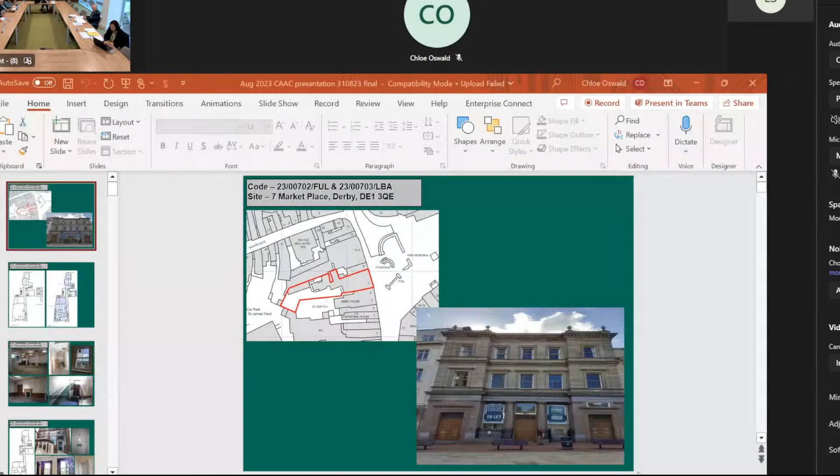So first on the agenda is number 7, Market Place. Now you'll recall that this has been before us, ground floor only, which has an approval for A3, sorry, for a change of use basement from professional services to cafe, restaurant or drinking establishment. Now that approval, and one of the approvals has now lapsed, and one is about to lapse, but that's irrespective of this application. If they bring them back to us, then so be it.

So we're looking specifically at the first and second floors, which are to be converted into apartments. So Chloe, can I ask you to? Certainly. Just a little bit of clarification: the applicant does not intend to include the ground floor use within the current application, and it may be that a further new listed building application is submitted for the ground floor.

In terms of the ground floor, changes to the already approved scheme are relatively limited and relate only to some changes to doors. I should say we've had confirmation today that in the original application it was proposed to replace all the windows and add wall insulation. We've had an email to say they now wish not to undertake those things, and they'll be looking at secondary glazing to all the windows instead.

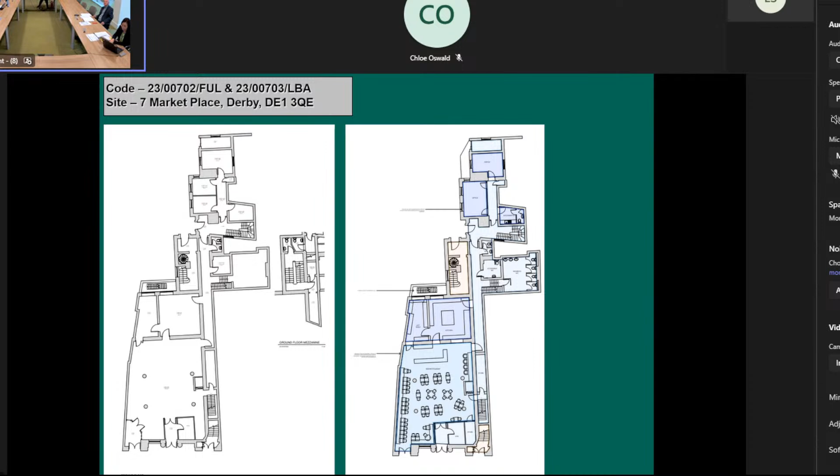So this will be subject to the acoustic report, which is expected next week. So, as I mentioned, other than the approved plan, there are very limited changes to the ground floor.

So to the first floor, this just gives you an idea of the existing quality of that front range, the cornicing, and the joinery.

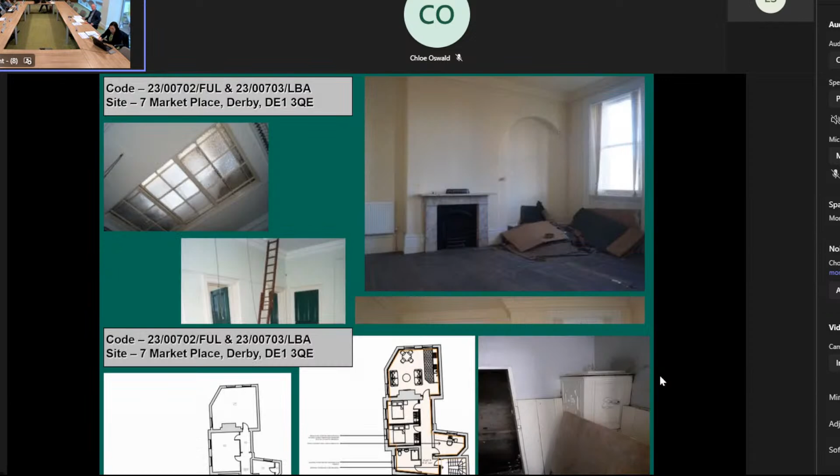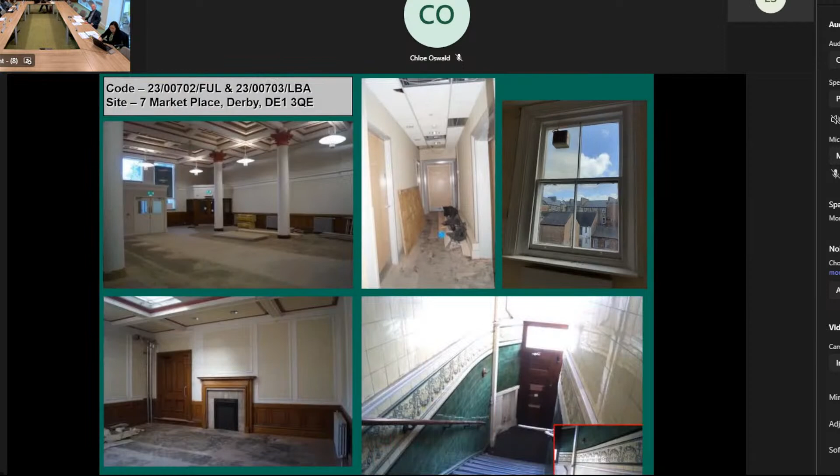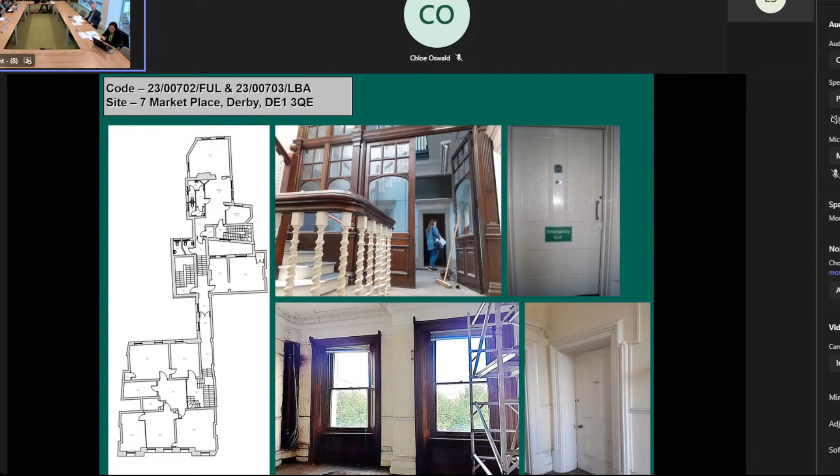So there were a number of changes being proposed on this first floor. I will come back to the first floor to show you. So in terms of quality, these are the spaces - you've seen these online anyway.

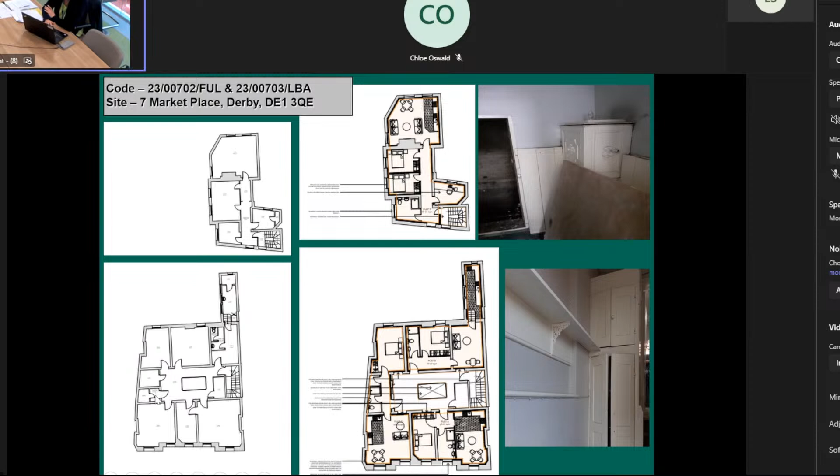Just while Chloe is doing that, Max has made a comment, not about the design, which he actually supports, but he said that the heritage statement said it was designed by somebody - he said it was actually designed by Smith, for the Smith Nottingham Bank, and built in 1871. So, a slight contradiction to the heritage statement.

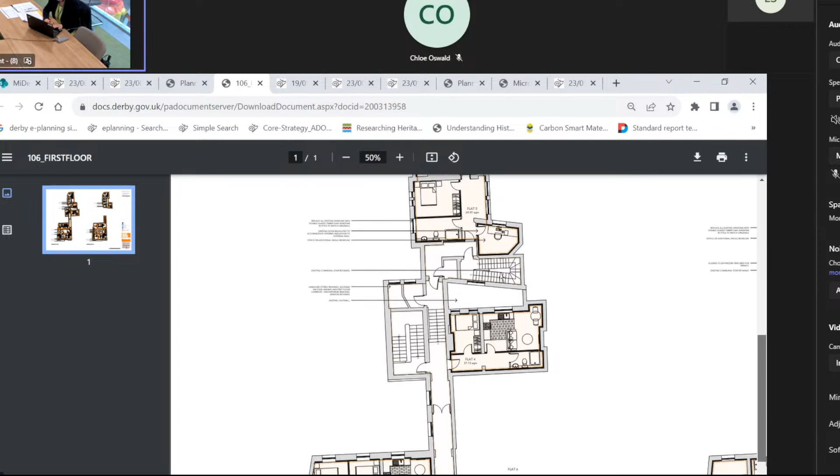So here are the first floor plans which you've seen online. Just zoom in slightly to run through the proposals.

There are a number of walls which show lining which is no longer proposed. In terms of the proposal, there is a level of subdivision within some of these spaces of the rooms that front the marketplace, some existing and some new. There are proposed new structural openings, obviously kitchens and shower rooms being proposed.

Once again, I think subdivision and the new structural openings are the ones which I wanted to point out to you. There's also the blocking of some existing doorways. You can see one adjacent to flat 3's living room.

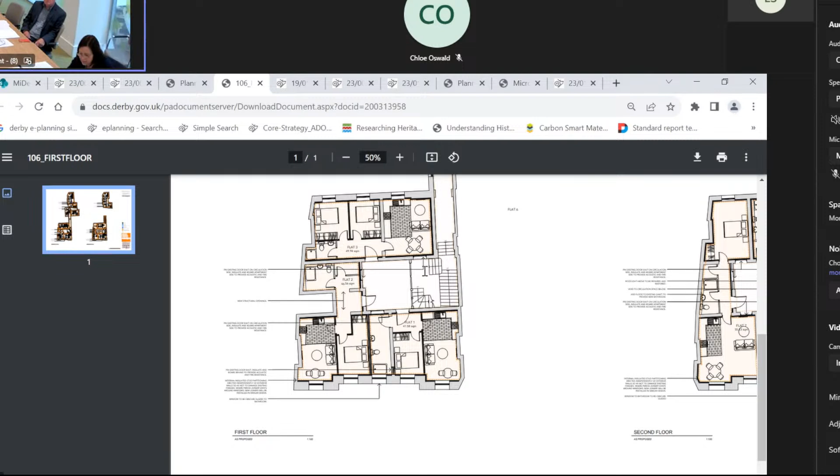In terms of the proposals. Okay, yeah, that's great. Thank you, Chloe.

Going back to what Chloe said in the first instance, it's good to hear that they have decided to keep the existing windows, to introduce secondary glazing, and to retain the wall lining, because there are quite a lot of distinct features and linings, door linings and architraves, cornices, and skirtings, which you can see is high quality there. And the high quality elements do seem to be towards the front of the building, which you'd expect, being a banking hall. The rear section is of a lesser quality.

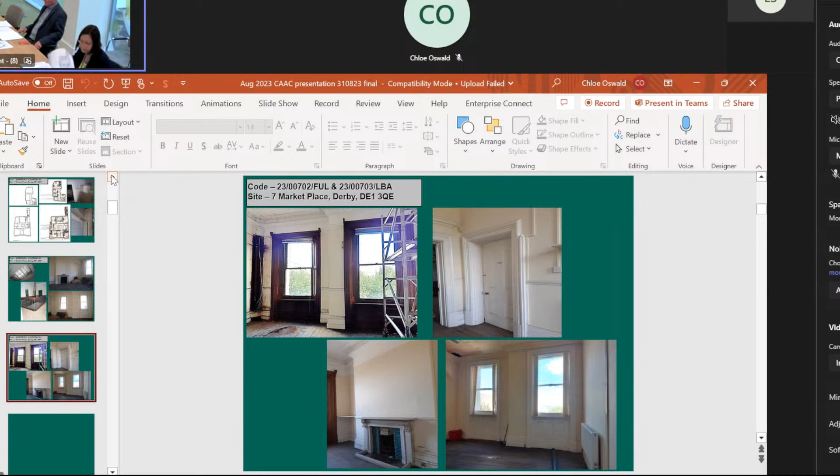So the next item is Wilderslowe House. Again, this has been before us before - as you recall, it was part of the Wadensmere development of the former DRI, that's now been sold off separately, and we've got a scheme to convert this into 14 apartments, which retains the old extent of the building, not as old as the main building. There are other elements as well - the conservatory is to remain in the form that it's in, but it's actually going to be rebuilt with different glazing. So we'll discuss both.

The state of the interior of the building is extremely poor. You will have read the heritage statement, which was very comprehensive and very interesting, and there were some photographs in there that showed some of the condition. I think this is one of those buildings that we've been trying to get under repair for a long time and get a new use for it. So over to you, Chloe.

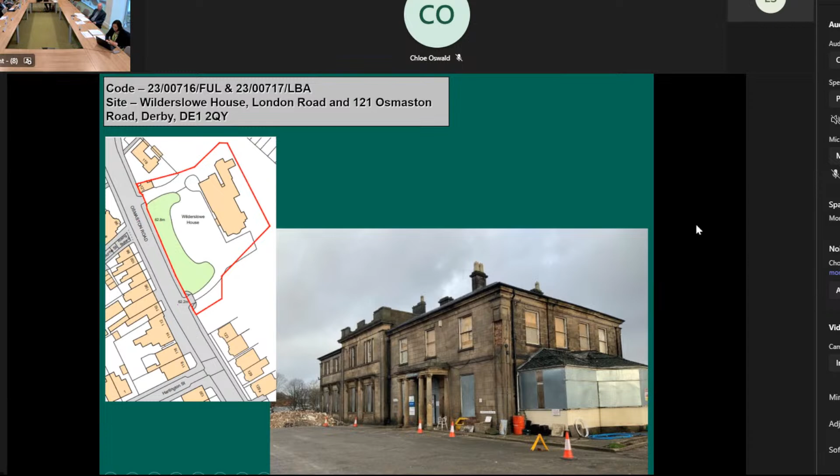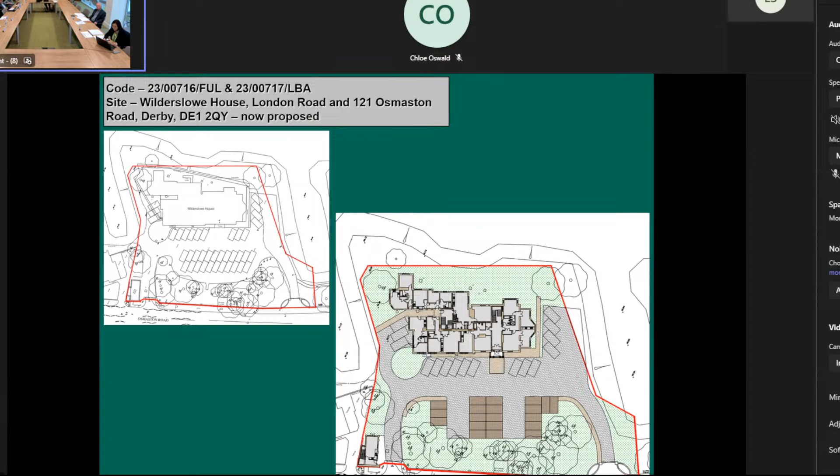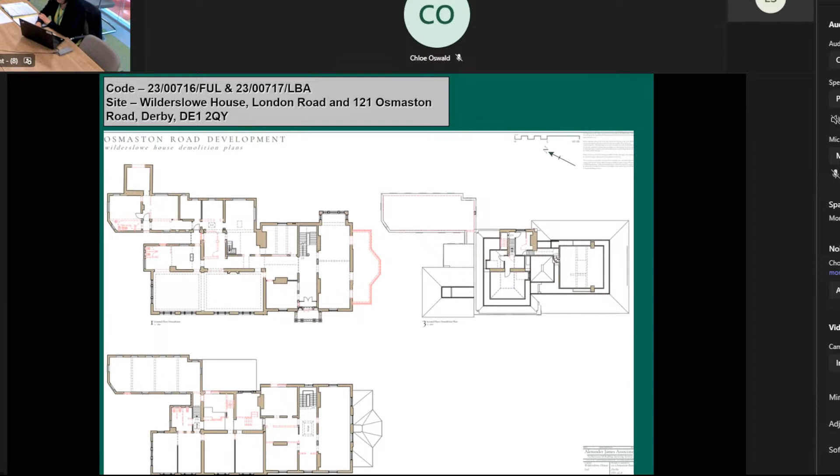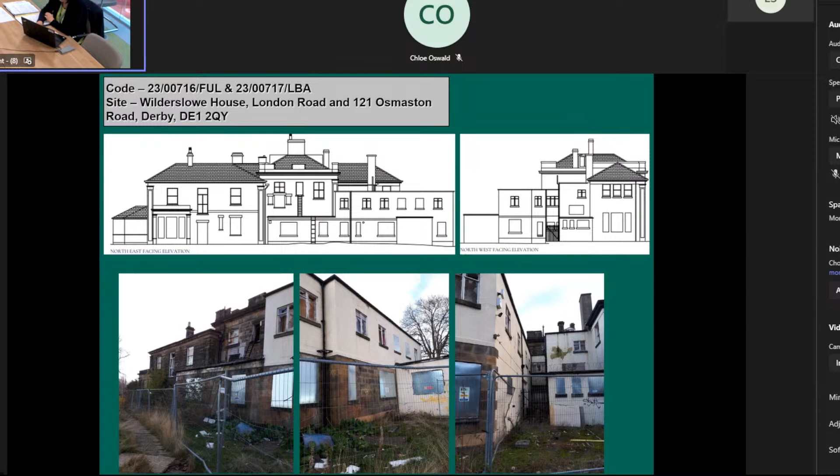So here is the north-east facing elevation, just focusing on the external impacts of the proposal. As you can see, the later extensions to the left side of the slide, which were previously proposed in this scheme, are proposed to be retained and a roof added - to the rear, to the side. Some photographs just showing you what it looks like. So these drawings show that 3-storey extension created on that back wing of the building.

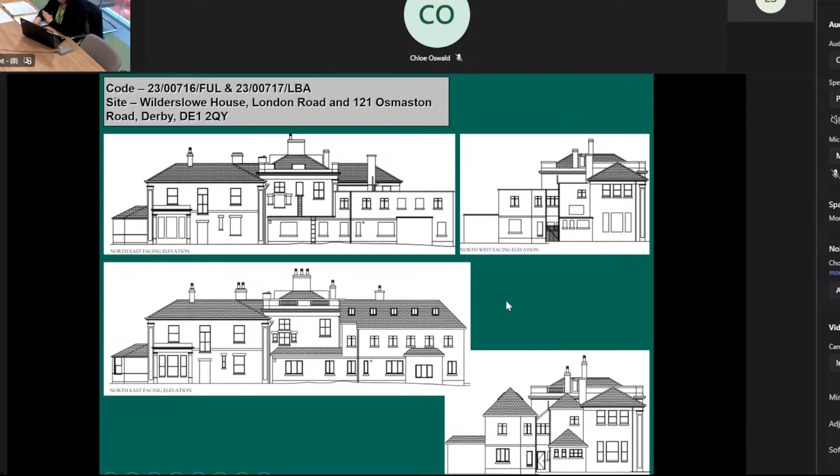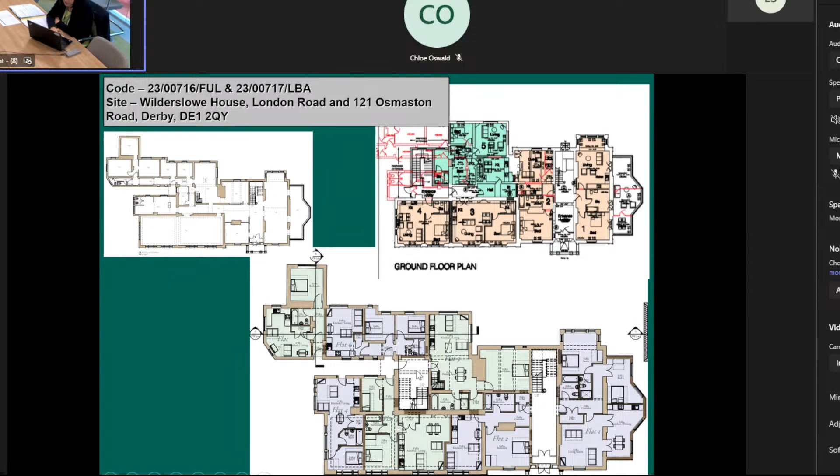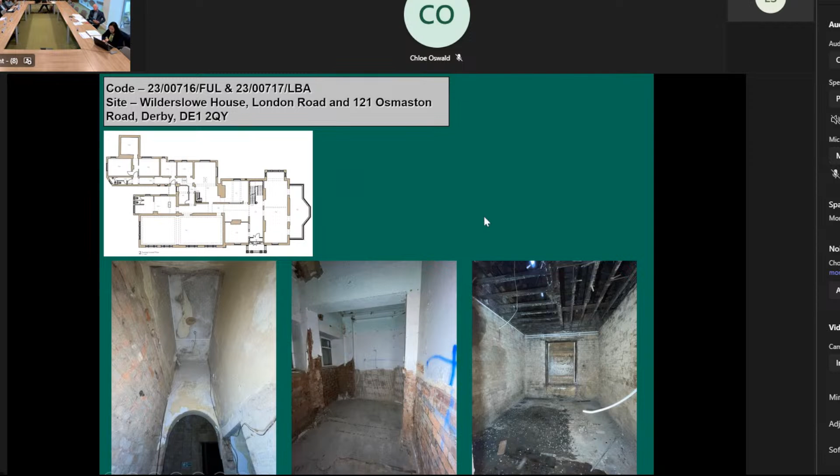In terms of the conservatory, I'm just obtaining some photographs showing the current detail. So it's on a brick plinth, it's got render on the outside.

The proposal is to construct a conservatory on that same footprint. But as you can see, it looks like there's limited windows. There are sash windows proposed to the southeast facing windows.

As I was unable to go in with the Smith team, slides will show you the current state of everything. These photographs were taken in 2018.

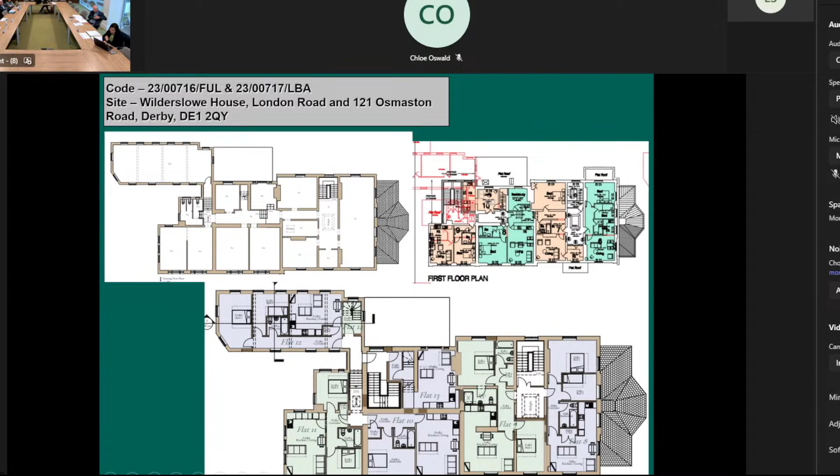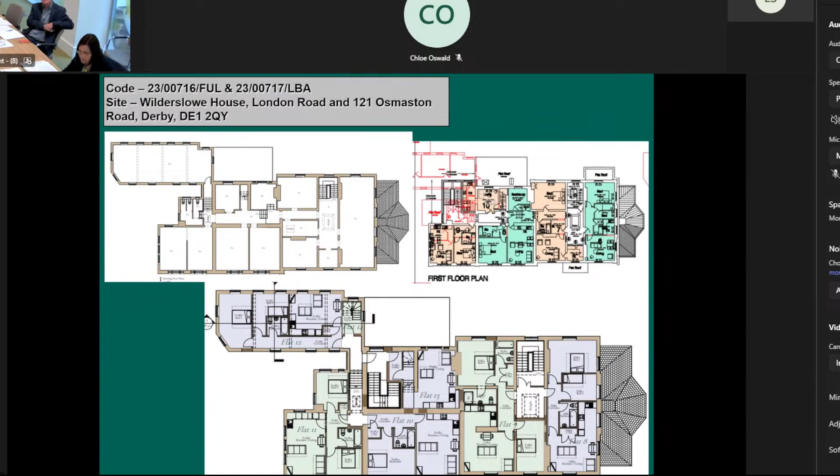So to the first floor, once again, it's the staircase. There's a change along with the retention of that. Main stairs with a mix, subdivision proposed.

Showing the existing proposal that we have to show, the now proposed second floor plan. Within the new extension, top of the two-storey, just a section through to show the details of that.

The lodge is also included within the proposals. It's thought to have been partially rebuilt in the past, according to the heritage statement. So the existing elevations show very little.

Proposed to these issues, apart from an extension in this area, a pitched roof rather than flat roof, and the extensions proposed right up to the front boundary wall. To the east facing, as you would have seen, instead of a single door, there's a double door proposed.

Inside, the reason for the extension to the previous extension is to house a staircase up to the first floor. Perhaps just to show you the simple zone, see the spaces.

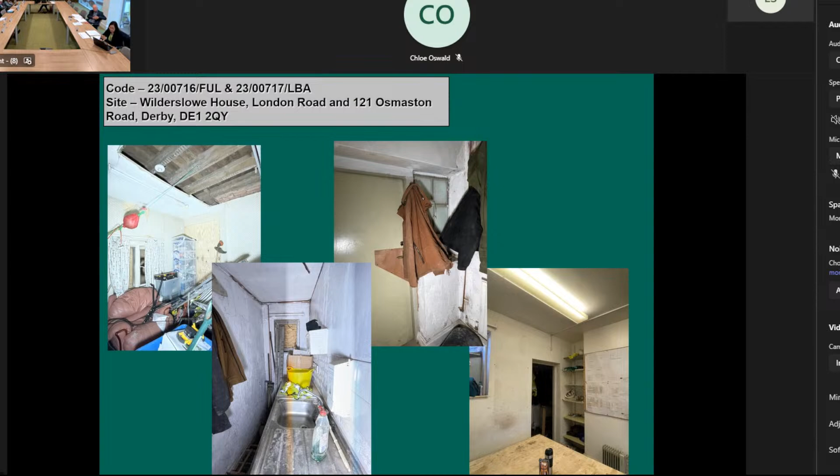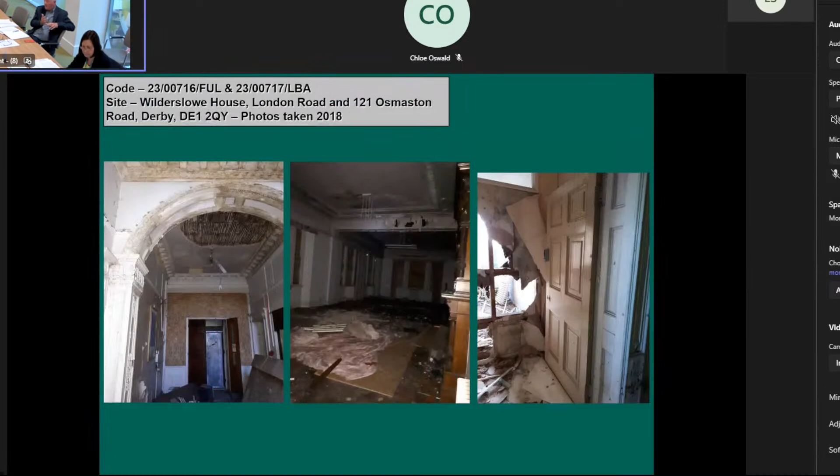Okay, thank you, Chloe. Yeah, so effectively we've got three elements to consider here. Firstly, there are repairs to the existing building, which is extremely important. Now, going to clean the exterior of the building and do stonework repairs, I think is a real positive. The extension to the second floor space is part of that, and the reconfiguration of the different materials.

That's to avoid the conservatory element, I think is also something we need to consider. And then the third part is of course, the lodge. It's a relatively simple building. Want to put an extension on the side with a hip roof on it. That small extension takes the proportion of the existing single extension on that side, but it comes right forward to the boundary wall. So that's something else to consider.

So, can I open it up for some discussion?

I was going to echo Chris's comments about the previous scheme. This scheme's been sat there for a few years now. Indeed, council. So really, it's to be commendable, isn't it? I think Max has been involved with it for a few years as well, getting something sorted. There are a few interventions there, but I think in balance, when you consider what they're taking on there, it's not a great deal.

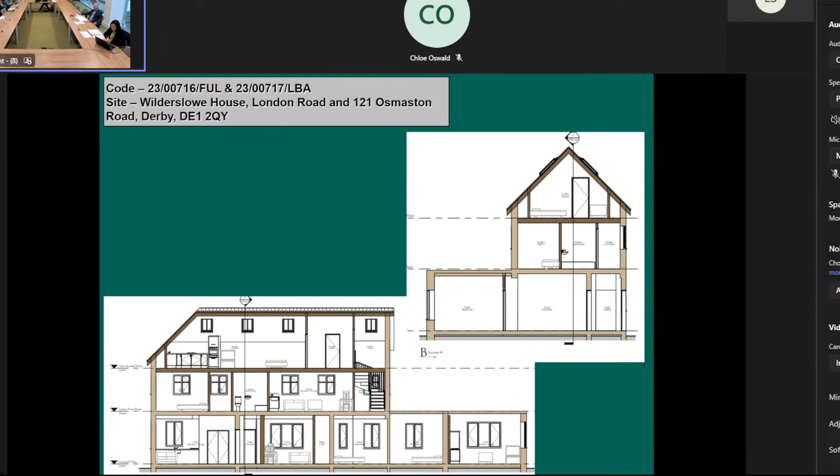Similar to the comment about the conservatory, it's a surprise they've bothered with the conservatory. It provides two bedrooms. But yeah, to call it a conservatory now, in this scheme, it's not.

I feel a little bit uncomfortable with the proportions, even though it's one of the proportions of glazing. I think it ought to respond to the addition rather than to the main building, a more delicate approach. So could there, I don't know whether it's shown like that, but is it proposed to be brick all the way around? I was thinking that if you change the window level all the way around to a different material, perhaps boarding or something, it would maintain that band of different contrasting material. Well, I think it's intended that it is brick base and render.

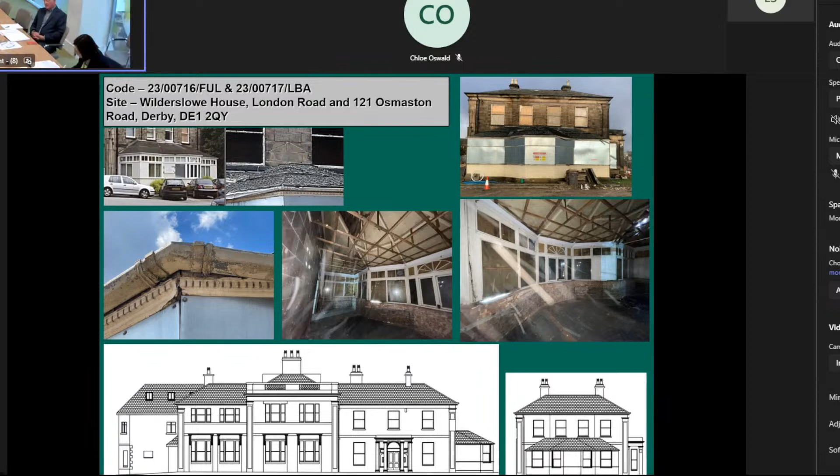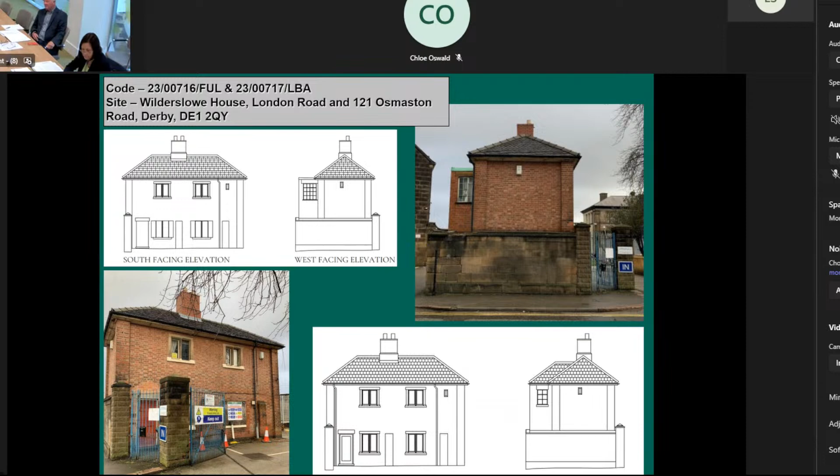So we've got, you can see on the photograph top right, the extension back. Now that extension is a head and pulled right forward. You can see the articulation of those piers front adjacent to the wall. That wall is actually, in Max's heritage statement, acknowledged as part of the original boundary. The piers to the right of it, I don't think, are.

My thoughts on this is that I've got no objection to the extension being inserted, but I feel it ought to be set back at least to the depth of the pier return on the front.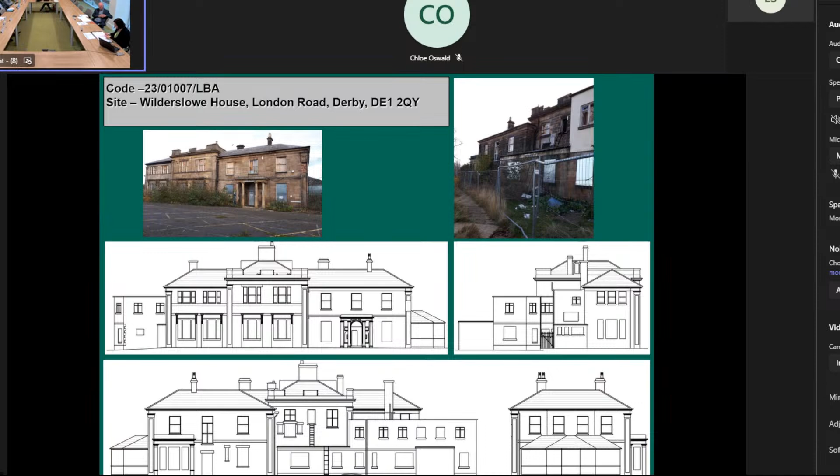The drawing that Chloe showed us with all the red notes is regrettably the full extent of the schedule for repairs. Now, I think there are a lot of repair works that need to be done on that building. I think a slightly more detailed document would benefit not only the contractor who's going to do this work, but also the officer, to see what is actually going to take place - have some sort of specification alongside that.

Because this building, the only elements left of any historic character is the exterior. And if that's not done right, we're going to end up with a reflection of the original building. I think a little bit more detail ought to be requested. As you were seeing, there is a restoration specification online, but yes, I would normally expect a bit more detail than this came in without a program.

So you'd normally look at elevations, maybe to show these sorts of jobs. It's often that they won't know the full extent till it's all scaffolded and you can actually look at it. So maybe, if it's also wanted to grant permission, then something that could be conditioned - conditioning it, yeah.

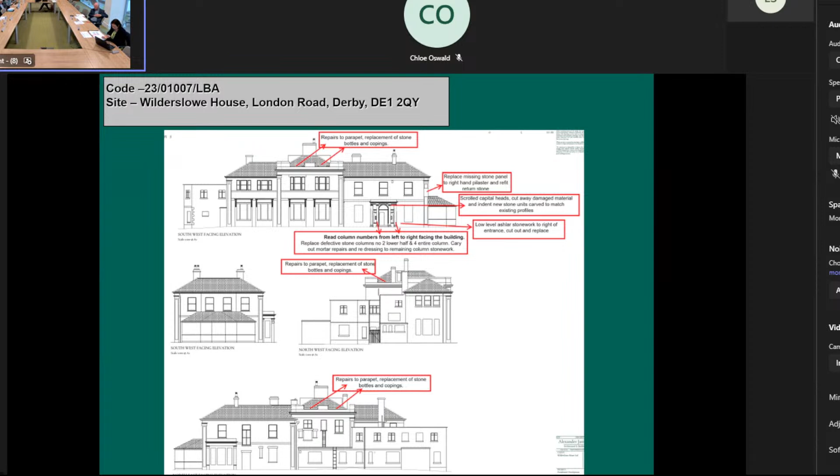Particularly in terms of curvature of some elements of the buildings, the new build that is. We obviously are going to concentrate on the modern warehouse and the engine house, engine shed.

I'll just point out, Historic England have actually come back with some comments which I think are worth giving you a resume of. They are asking for further information on materials and details in relation to the listed buildings and the residential development. They are concerned about the removal of brick partitions in the office area of the bonded warehouse, you call the curved triangle section.

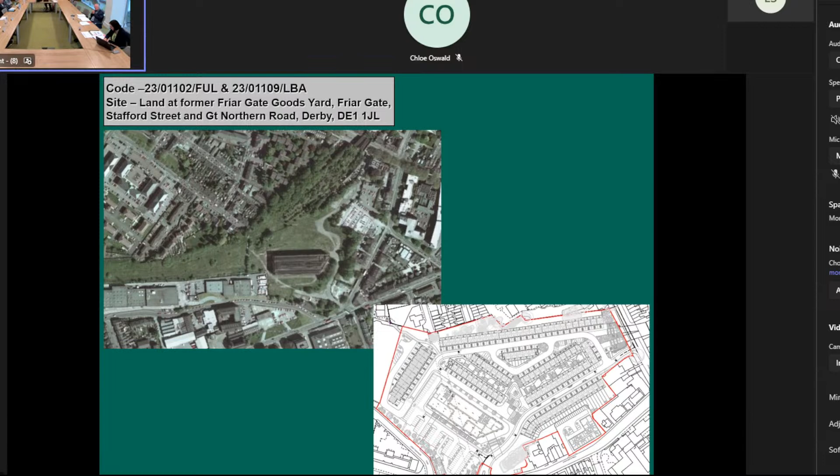So there's quite a lot of heritage statement, some recording documents for both the Bonded Warehouse and Junction. So you'll see in these what was previously on this site.

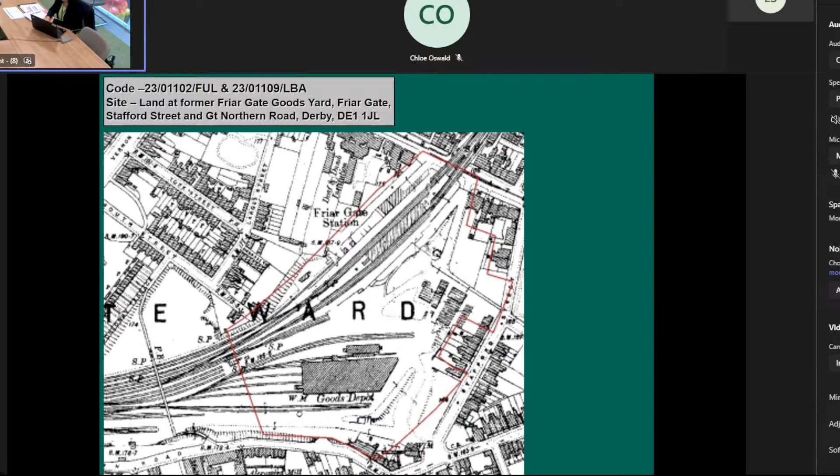So the proposal is for residential development and to convert the Bonded Warehouse and engine shed to pubs, food office space, etc., and to partially demolish the abutments to the bridge.

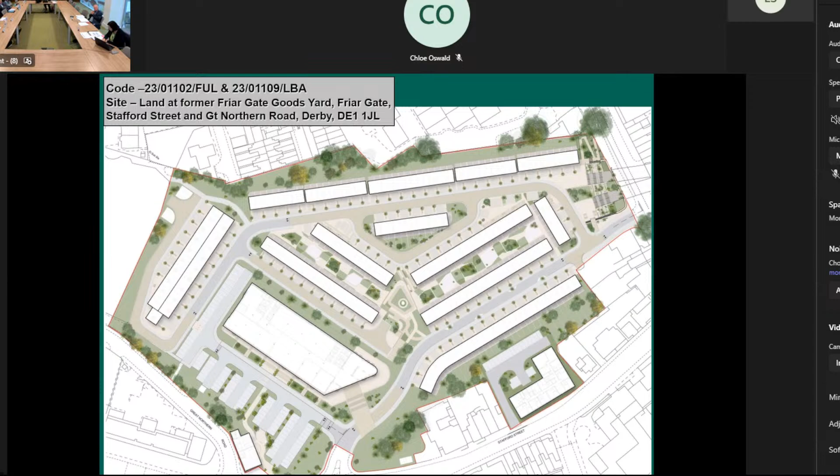So I'm going to go through each of the buildings in turn, starting with the Bonded Warehouse. Hopefully we'll be able to cover everything as we go through, and I'll stop periodically to see if you have anything to add.

So you're aware of the current condition of the warehouse. Historically, just wanted to show you the spaces and the roof form which you picked up in terms of the slate roofs, and some of the number of lights installed, which you can see in the pictures.

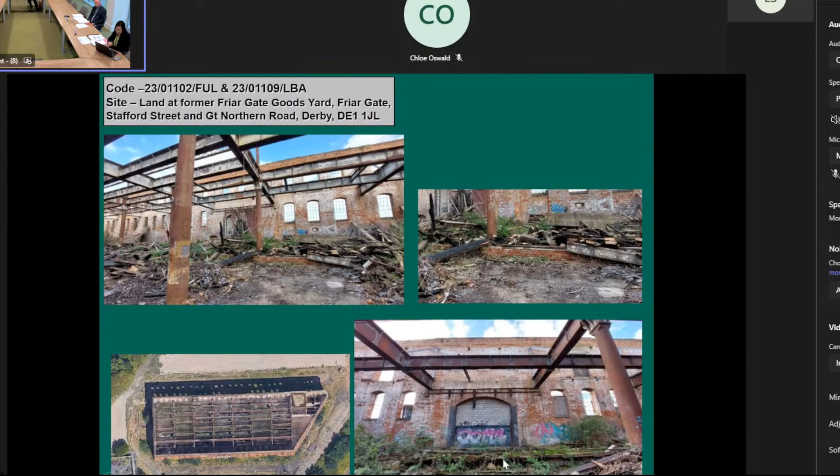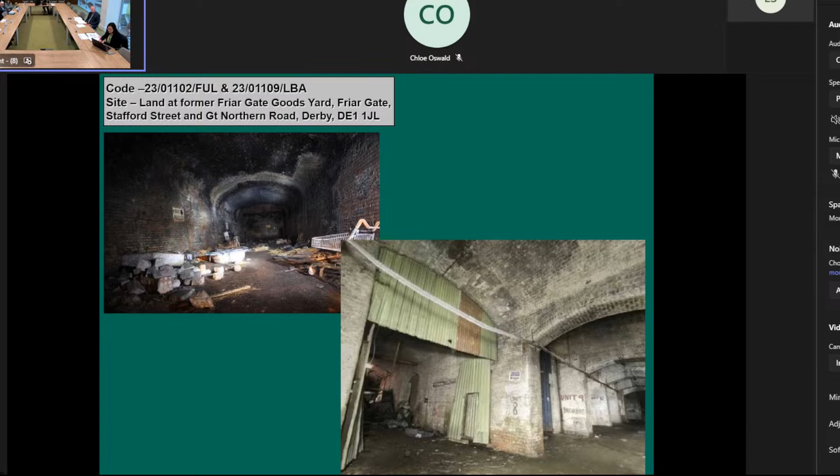There's also proposed at the moment a basement and the linking tunnel from Great Northern Road. I'm just showing you what's there, and we might have... so these are the proposals for the work.

So just looking at the proposals in terms of the existing demolitions plan, obviously there are some divisions in the former offices area which are proposed to be removed. Here, the proposal is working with that structure.

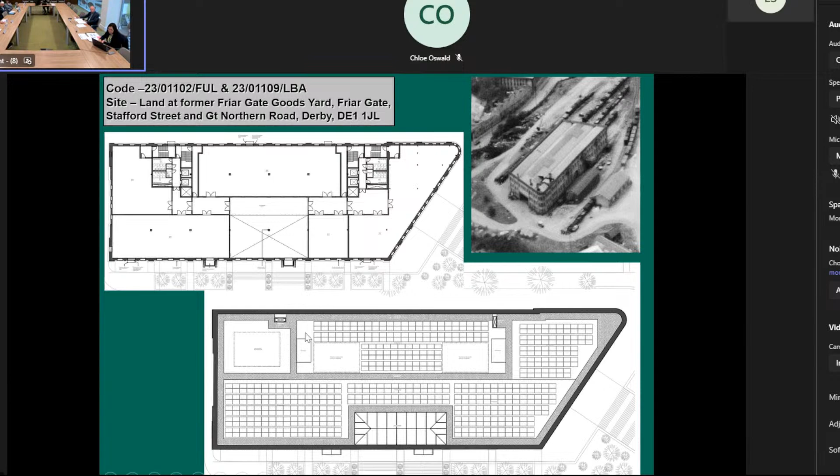To the roof, PVs are proposed, and 2 lift overruns. Just a section through showing it's proposed to be 3 floors generally—ground, first, and within the bonded warehouse itself, instead of the 2 that were originally there.

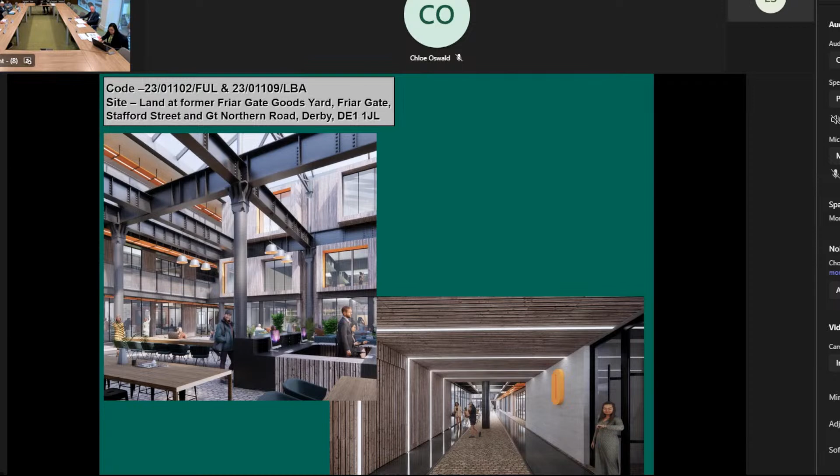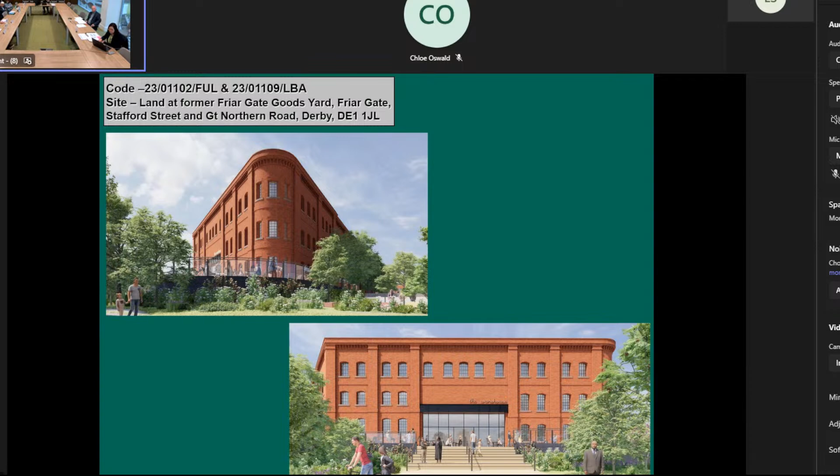And then some of the visuals which you've seen, so you can clearly see the 3 floors and how it's going to work, obviously with the steps leading up on 2 fronts up to the warehouse.

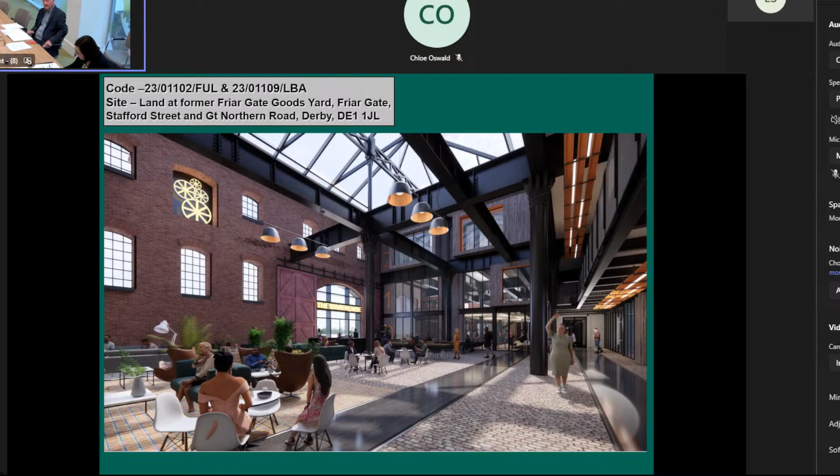So, yes, quite clearly a very big scheme. Just highlighting the concerns that Historic England had, relating to the offices area and removing the brick partitions. And I think I echo their view in that respect, because any existing structure really ought to be retained as much as possible.

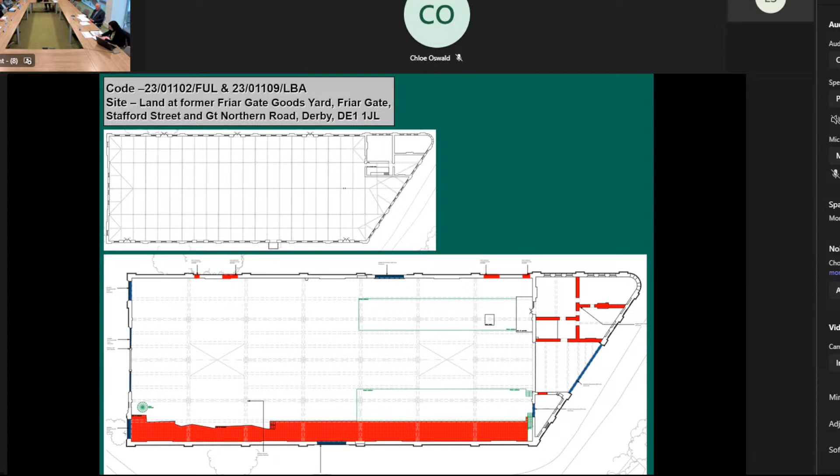And also wonder whether those sections of wall have any bracing characteristics for those anyway—structural engineers would know. So, open it up for discussion.

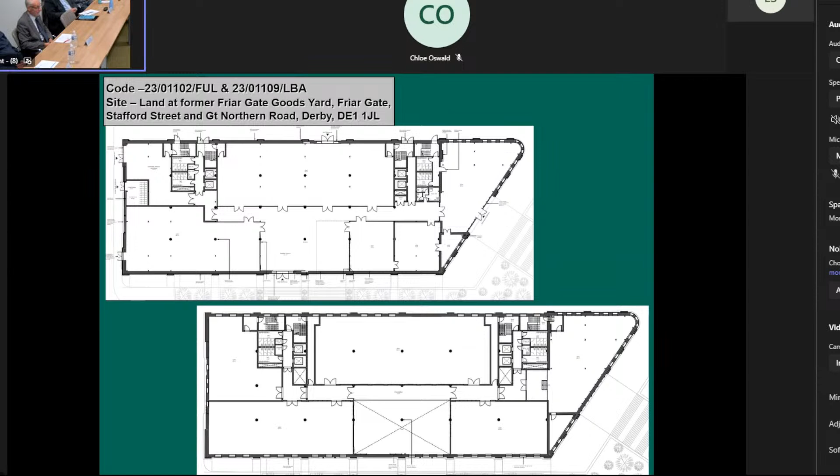Well, I'd like to open by saying that I would like to congratulate the architects on a massive project, and the developers as well. It's been sitting there for the last half century, gradually—in fact it's a testament to 19th century engineering that it's still there, despite everything that's been thrown at it. I mean, there are obviously elements of detail we'll probably discuss, but personally I'm not too concerned.

It should be retained or can be retained. Yeah, fair enough. But as far as the platforms are concerned, surely it's really helpful. No, I share your view on that, David. I think because the platforms are really—there's very little of it left—and for the sake of creating an entertaining space within that building, which picks up on the imagery of the railway very well, I think. So I'm not concerned about that.

I also welcome the reintroduction of the lucams in a modern interpretation, which I think is good to do. The only thing that I would echo is the wholesale removal of those partitions and the different windows proposed. Originally timber windows in the section you can see at the central photo, which I think should be put back as timber windows in offices. And the metal windows down the side, if they're capable of being restored, that's fine, but a metal window replacement down there, I think, would be possible.

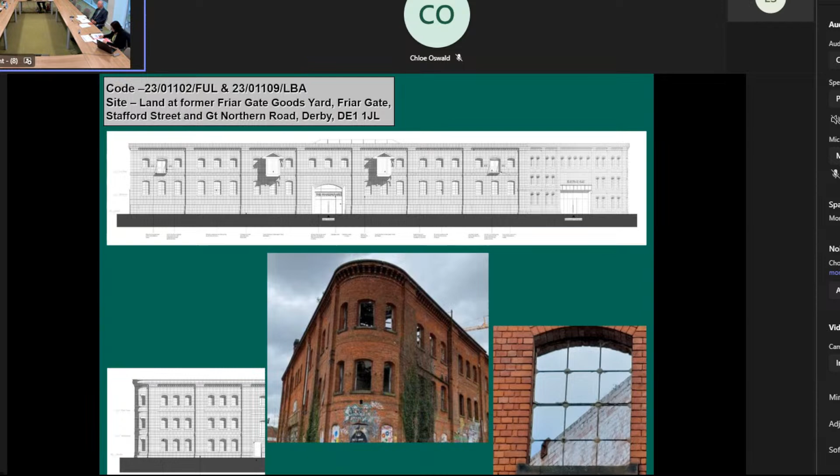Also very much positive about the whole thing. I mean, we mentioned a lot of stuff when we did have that discussion, two meetings ago, three meetings ago, I can't remember. And I'm sure we did mention the importance of the integration of the bridge and making that a destination in town. I'm not sure they've worked that out really yet. It's not necessarily entirely their responsibility, but I don't think anything they're doing is going to stand in the way of something more being made of the bridge and just bringing the site back into use.

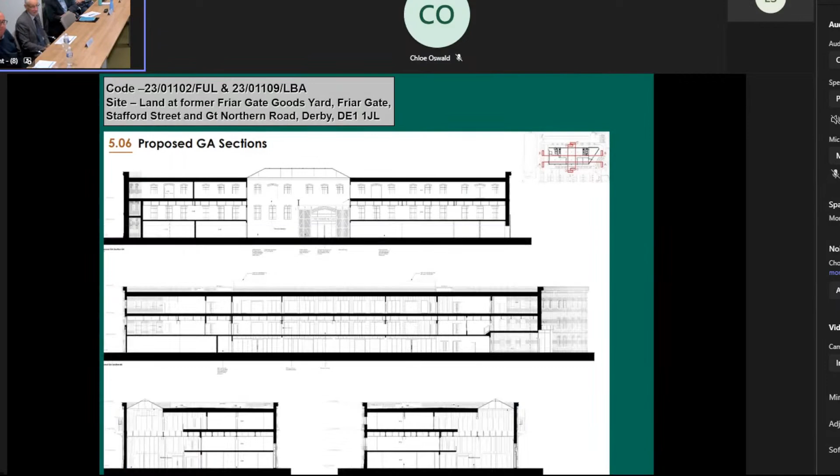Well, they've got these two big staircases, otherwise don't go anywhere. No, well, they're sort of hamstrung a little bit because the development on the other side of the road forms a very definite full stop. Well, that was another reason I objected. It didn't happen the way it was supposed to, the engineers. Do you have anything else to mention?

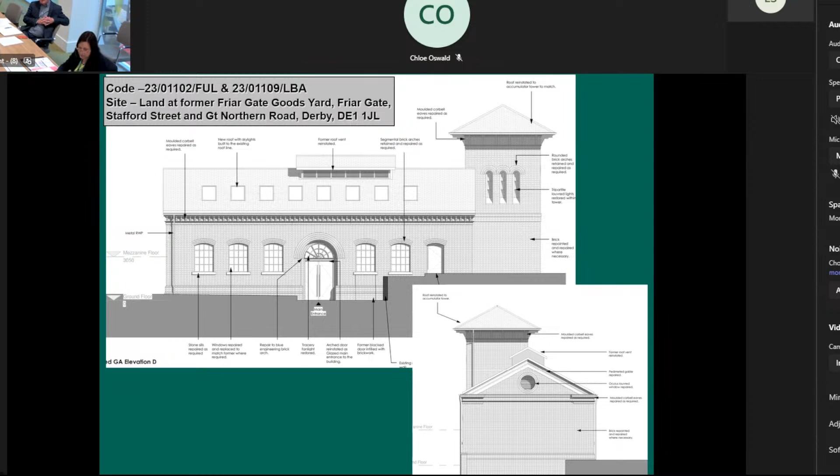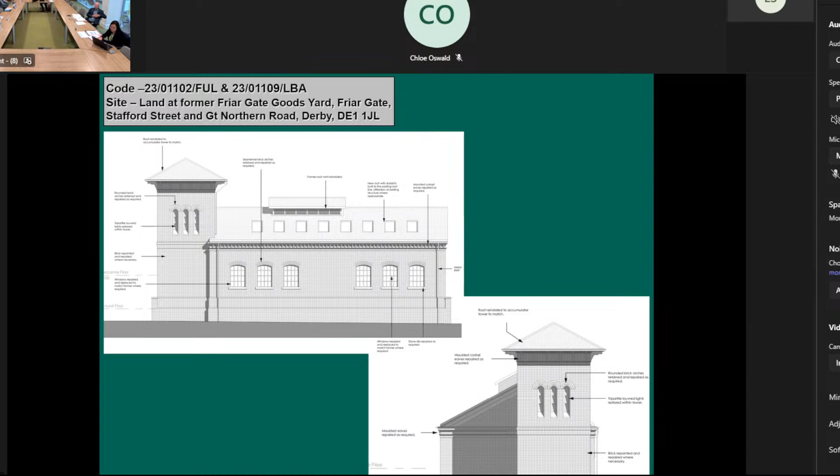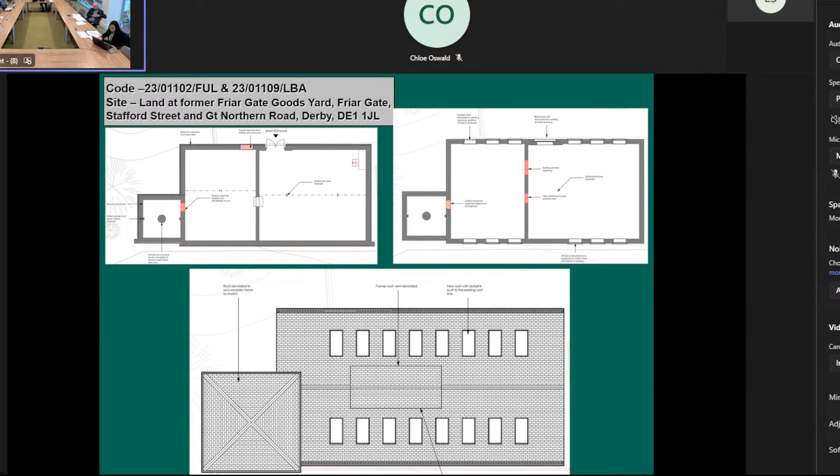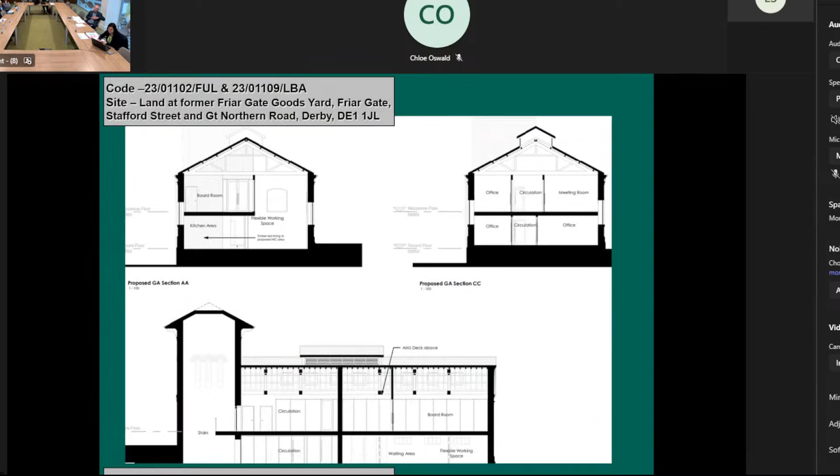That's the shed. Okay, summary: the elements on the engine shed—I think the interpretation of the interior spaces, the use of the accumulator tower for vertical circulation, and the expression of double height space and void, is all very clever. Well done.

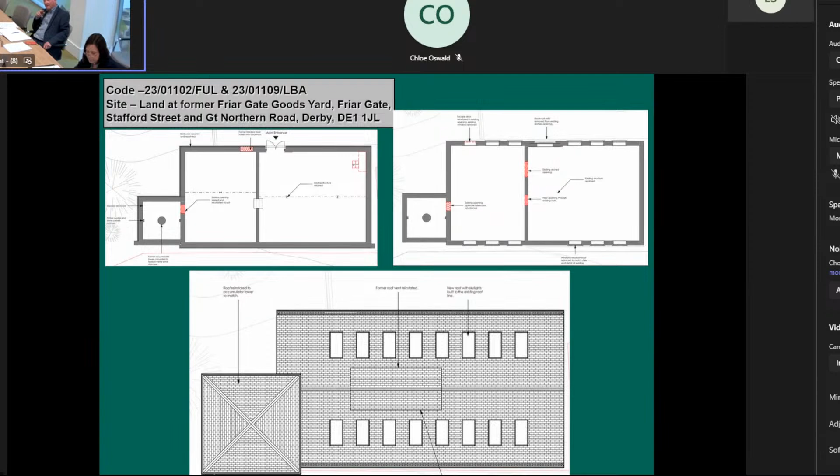The roof lights—you've got 8 down each side. I do feel that's a little bit overkill, so they could potentially be reduced down, and I think Historic England referred to that as we mentioned earlier. But it wasn't uncommon to have inline roof lights in a building like this. My observation is that if you had 2, miss one, then another 2, miss one, I think that would be sufficient.

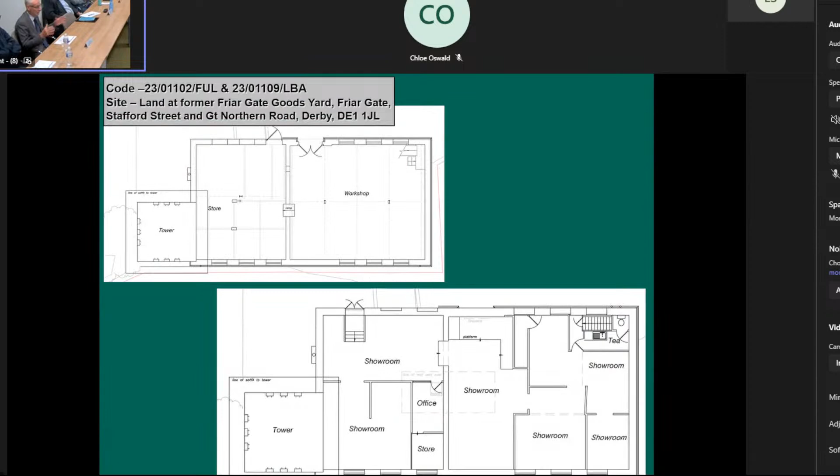Would it look better if they were continuous, with glazing bars in between? A continuous strip, yeah—perhaps just one down. Potentially it could, but then you'd get a long glazed strip in the roof, which is sort of flexible.

I'd have thought to start with they'd just line them up with the windows. Potentially so—and this end here too. If you're on the drawing, the scale is such that it doesn't really show, so I think the windows need to restore.

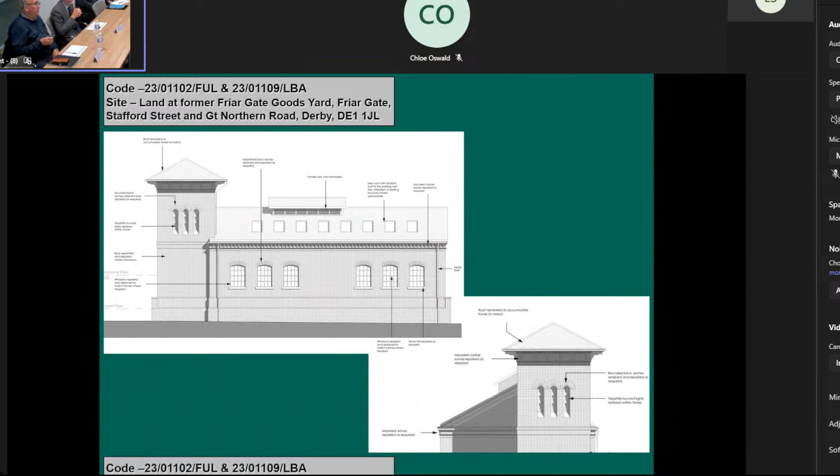Have we got an end user for this building? Well, it looks like it's been designed for an end user, doesn't it? No, they came before—they were starting the business. They did mention it looks like it's been designed for somebody particular, which is fine, but we need to consider that.

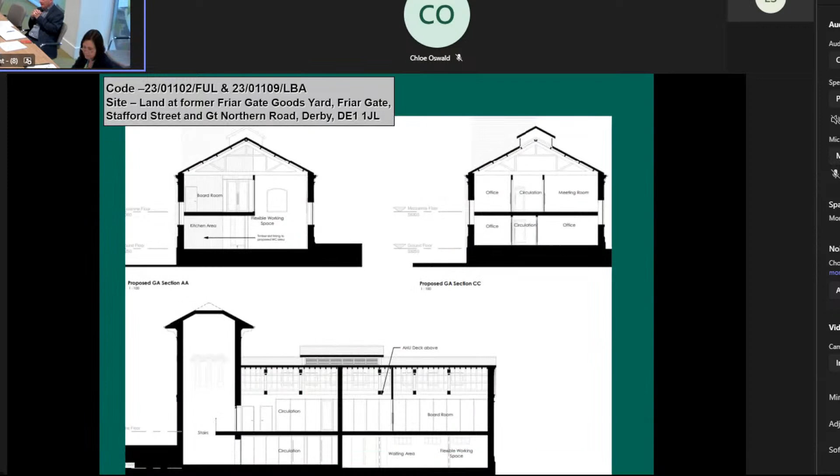On the roof structure—there are apparently elements of the roof structure that still exist, and I think a structural engineer needs to look at it. If the pattern of that roof is such that it still works and responds to the scheme they've got, then I think that's a path to follow. I still think that sort of green post arrangement they're showing there is quite attractive and works well.

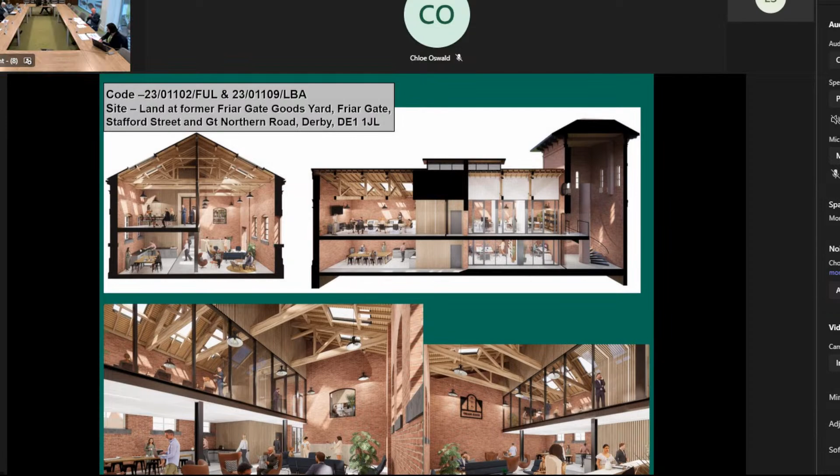Thank you, Chloe. Moving on to the next item, which is the bridge abutments—vision bridge abutments to Friar Gate Station, on top of the abutments adjacent to the bridge and the entrance, so the stairs up to the station platform.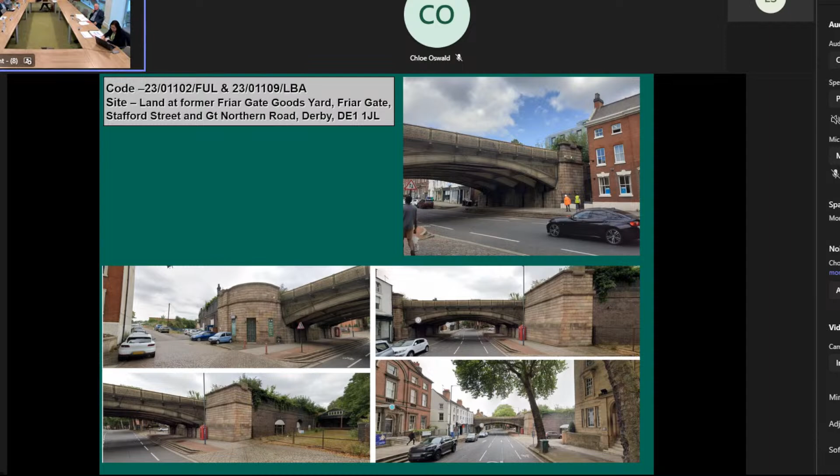So very little still remains—the railway lines are long gone. Those lines are obviously a key view of the Friar Gate conservation area into the city, so there's a kind of condition around the extended continuity into the site.

Part of this report goes through that in detail. Some have collapsed and some haven't—it's quite far limited to the extent the arches are. There's a demolitions plan showing the extent, which is pretty much everything apart from a couple of brick arches, in terms of the wall behind it, a small section on the side, and these are the stone elements.

You'll notice the detail in the condition report, which talks about some issues of waterproofing—the structure shouldn't be able to... there's an alternative.

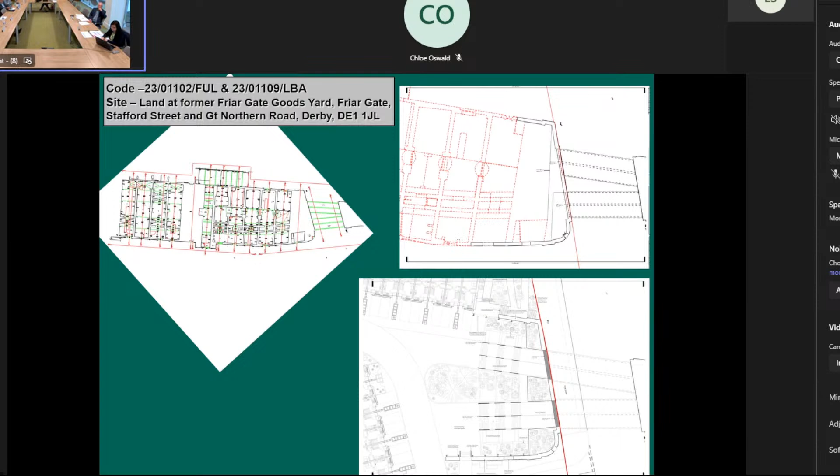Here are the elevations, just showing the extent of the wall which is proposed to be retained, and showing the extent of the arches. Inside the arches themselves, a number still contain these vaulted structures within. Just to give a visual idea already in terms of the stepped arrangements and landscape, and the extent of the wall being retained.

That's being cut back on the right hand side. What's on the line?

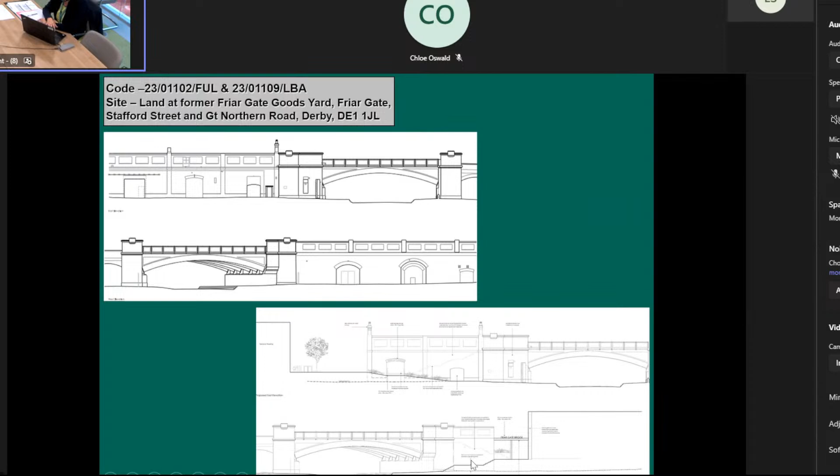So this is the extent of the wall being retained up to—oh right, so up to there, yes, sorry, on that side. There's the stone part. Yeah, it looked more prominent in the 3D image than it did on the right. So that gives you a bit of an idea about the extent of the walls proposed to be retained.

So what's being proposed here is a limited amount being retained, obviously given the difference in levels, and there's a creation of a different level. So there's access at the top part, and there's a proposal for a facade at the gable end of this.

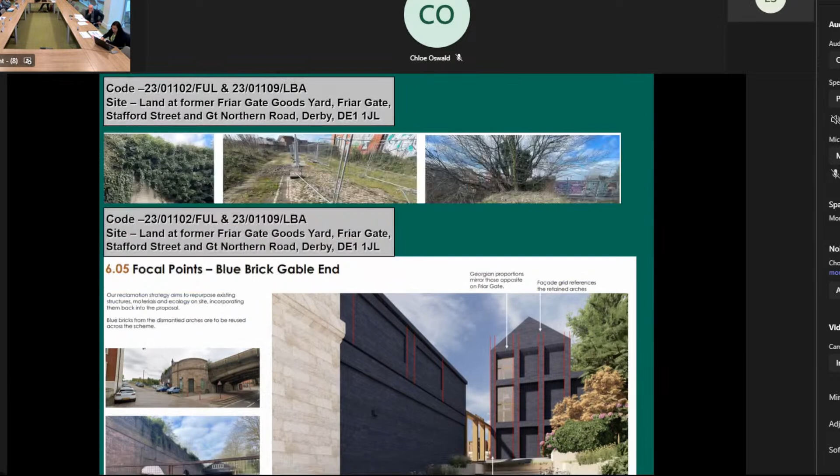Also within the documentation, it talks about the reclamation strategy, which aims to repurpose existing structures and materials and incorporate them back into the proposal. The exact details of where they're proposing to reuse granite setts, stone, etc. is unknown—I think they relocated the crane base.

So that's a summary of it all. There is considerable loss here, a second scheme seemingly. There is an engineer's report that identifies quite a lot of damage has occurred within the interior of the arches, quite a lot of bulging. As to when that took place, nobody can really tell. Some of it's really historic, some of it's just been left in a state of dereliction. So clearly historic England got reservations about it.

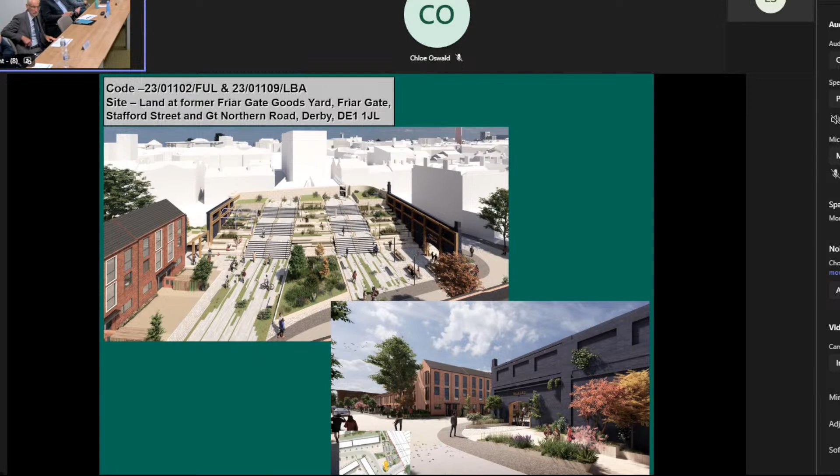What I would like to see is some interpretation included, so that this visualises what had been there.

So I think ideally, Paul, what we're saying is that we'd like to get the arches really, if it had been starting from scratch with the design. But presumably because of the cost of keeping them, and also the amount of space that you lose for residential—well, I think that doesn't add up, does it? They don't want to lose it. Well, no, but I think if that's the case, then they need to put forward a structural and economic justification. Yeah, well I'd agree with that. I think from our point of view, as a committee, we'd like to see that. I would like to see it.

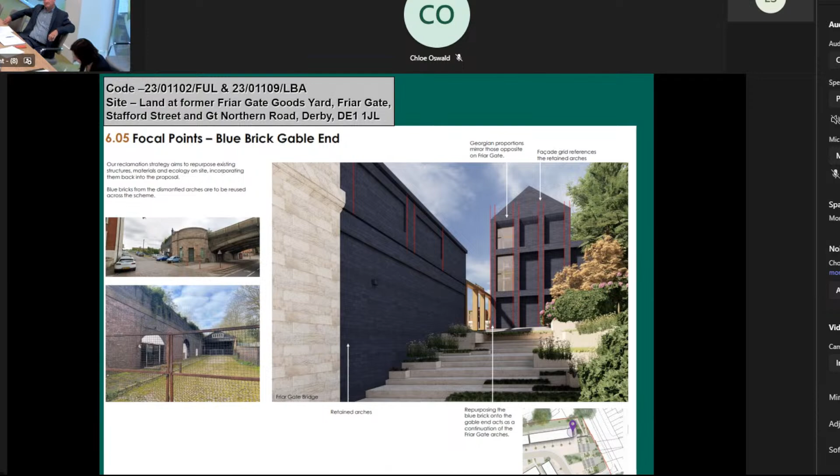It's a visual. Brickwork to ground floor, and really simple application information.

A couple of paragraphs just to show this context is proposed context. That one. Yeah, that's fine, thank you.

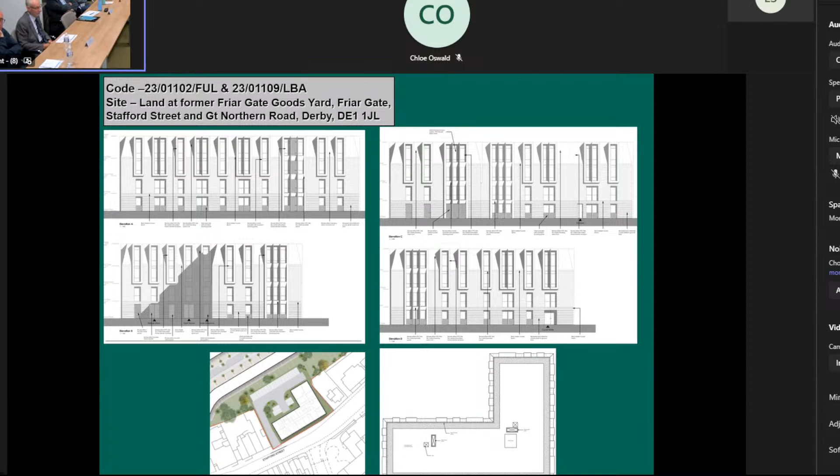Better than most of the flats that have been thrown up recently. It reminds me of Police House in Parliament Street. A little bit - I think that's where it's come from. Bit of flavour of that.

I wonder, because yes, it is broken up into elements, but I wonder whether it ought to have a bit more layering. The corner - it's almost asking for a turret on the corner, rather than that rather awkward mansard that just appears.

You are going to see this obliquely as you go down Stafford Street. I'm not entirely comfortable with it as a piece of design. I think it needs to respond probably slightly more to the villas, have a bit more division.

Well, the cladding on that roof, on that mansard, is it copper or bronze? The alternative is to bring it down to the bottom of the windows and break it into two. I'm not sure that's going to help - I think that's just going to make it heavier, make it look like a box on top.

And put a corner, as you say. I think if something were done with that corner element, that whole corner block as you come down Stafford Street, then maybe the tower on the engine house on that corner - that's the point, isn't it?

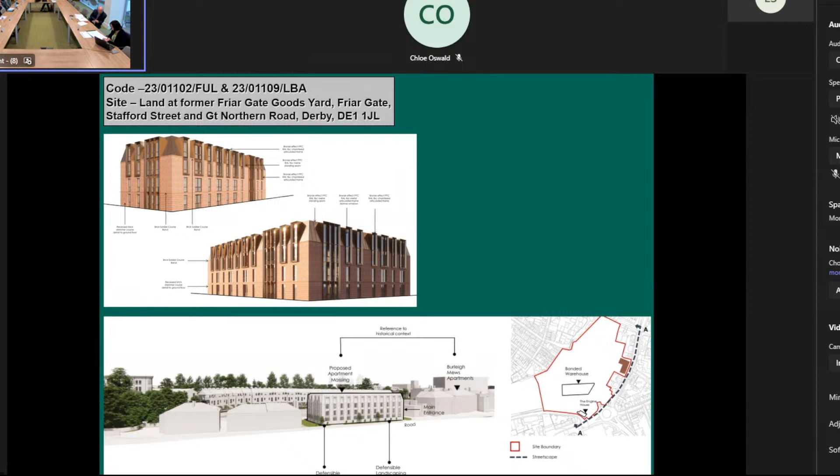Right, so just for clarification, there's no issues with height, scale, massing, layout, materials, or its relationship with its context. Apparently not. That's the trouble, isn't it, probably?

I've got a few slides regarding the wider site - that's the next section of it. As you've already seen, rows of houses, a living form that's been added, as you've noted.

There's a number of house types, 2 and 3 storey. The predominant material is brick, different colours and tones of brick, with a tiled roof. There are some different types that you see. And as we discussed previously, the window proportions and vertical emphasis.

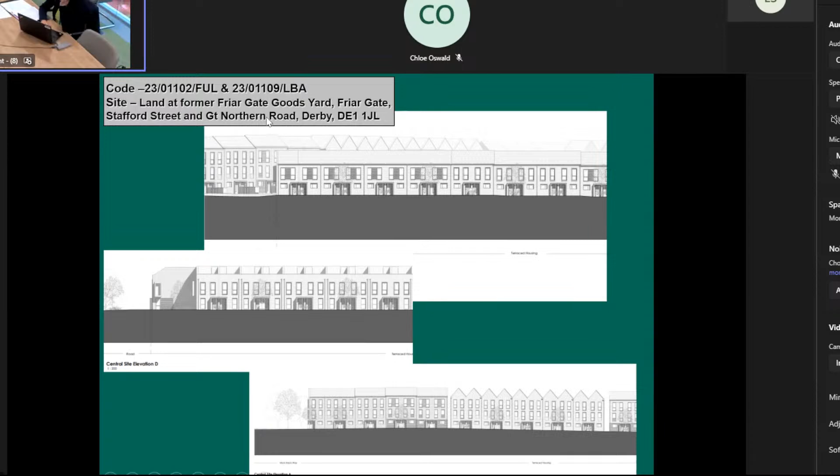So just running through quickly, you can see the consideration such as the privacy, some flat roof, some gable end, some straight, and other back-to-back flat roof.

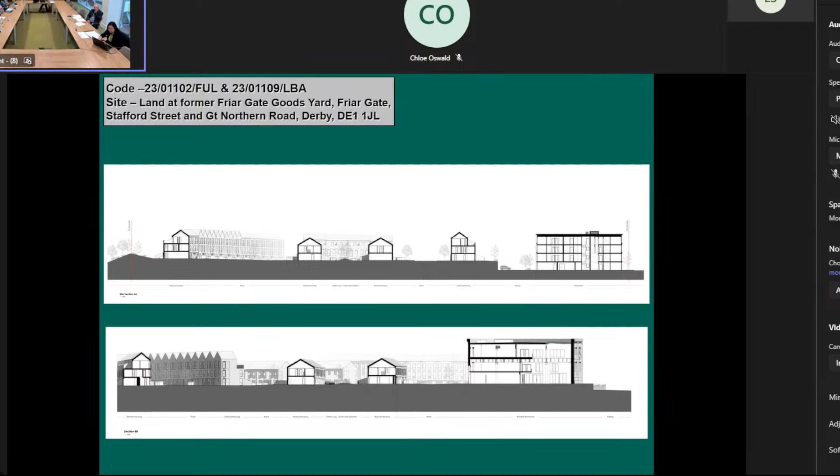Here's a section through the site showing the height of things through 2 stories in relation to the block. The bottom one relates to a number of different visuals contained within the vision pack in terms of the size of the different house types, and also in terms of the landscaping.

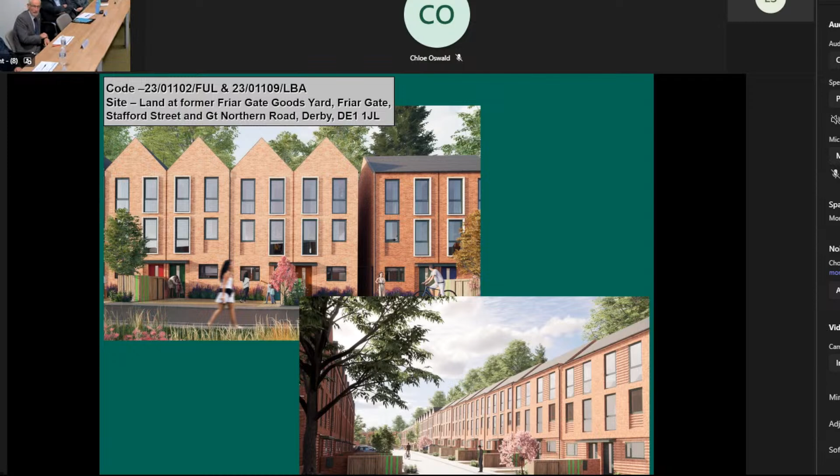Some of those little ones with gables remind me a bit of St Andrews. Can we just go to the site plan? I don't even know what that means.

The other element we highlighted, apart from the curvature of the building, is the triangle where the hydraulic crane is going to be repositioned. We've got a keyhole effect through there, and we've asked if that small block that sits back there could have some central key element to make it more of a statement, to see the sequence of views from the bonded warehouse through the development. That's not been incorporated.

There's not a lot of open space in it, Paul, is there? That triangle would have been ideal for a bit of open space. There's shared gardens between them, it's a shared space between both. So is there no objection, I make that comment about the... nothing particularly.